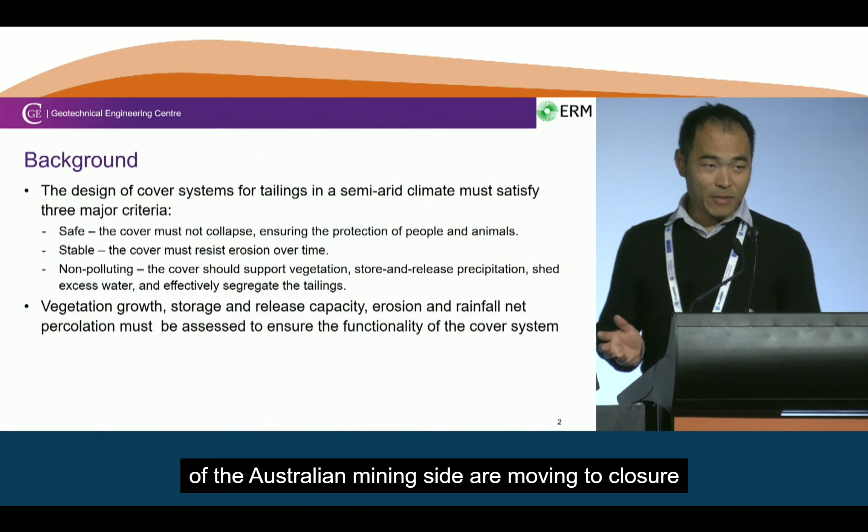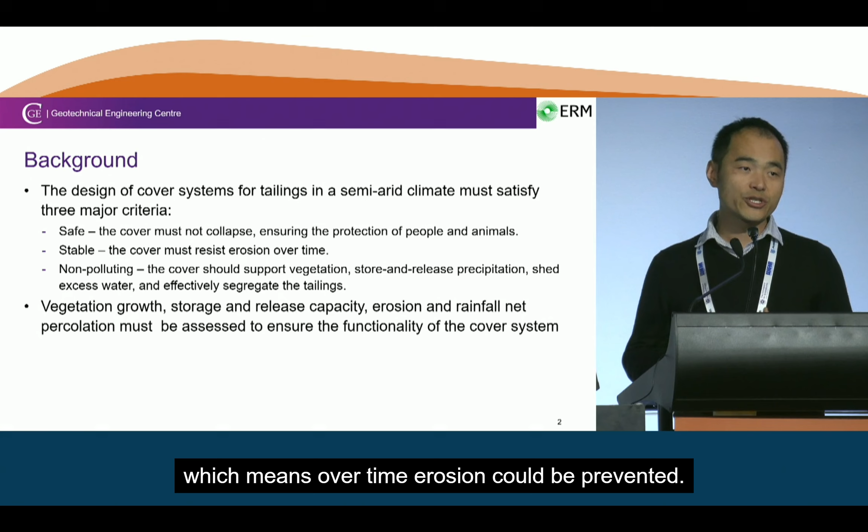Many Australian mining sites are moving to closure, and the closure has to meet 3 fundamental criteria. Safe, not killing people and animals. Second, it needs to be stable, meaning over time erosion could be prevented. Number 3 is non-polluting, meaning it's able to store and release water for vegetation growth, so eventually the landform is able to sustain itself.

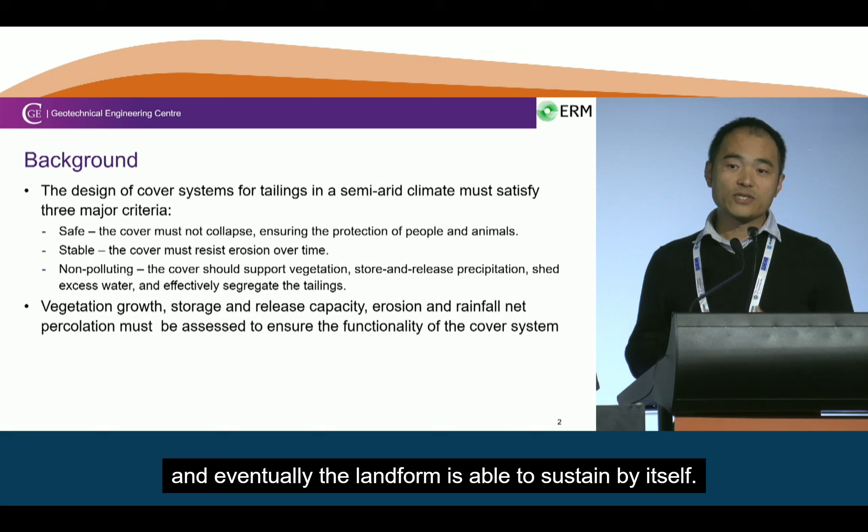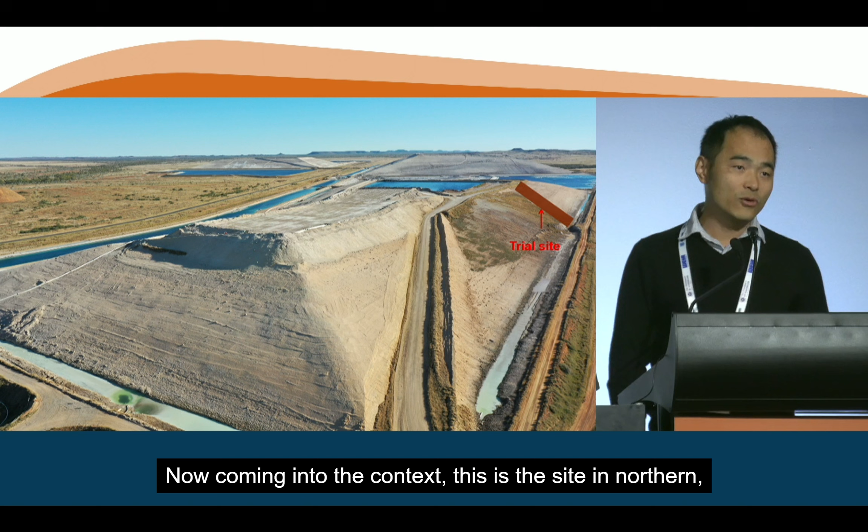All of those factors must be assessed by the soil cover, and these are the criteria we must meet. Coming into context, this is the site in northern Queensland. The local rainfall is about 400 millimeters per year, and the evapotranspiration potential is about 3 meters. So basically there is a water deficit.

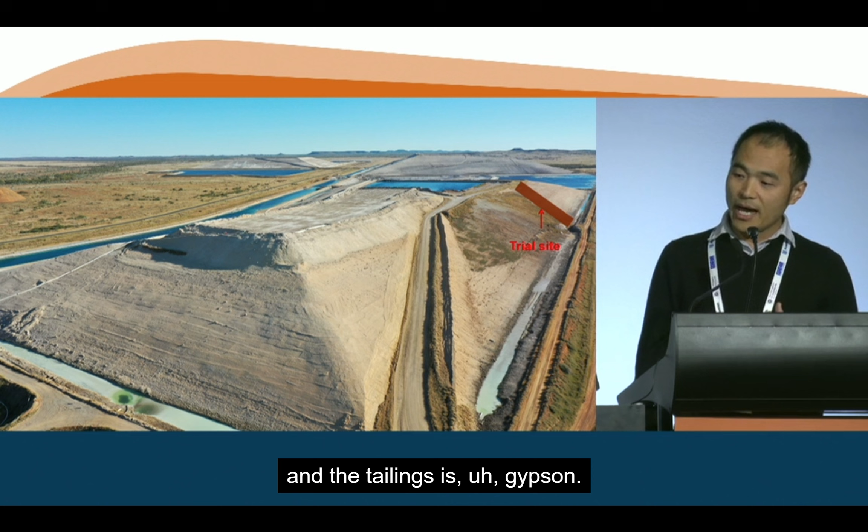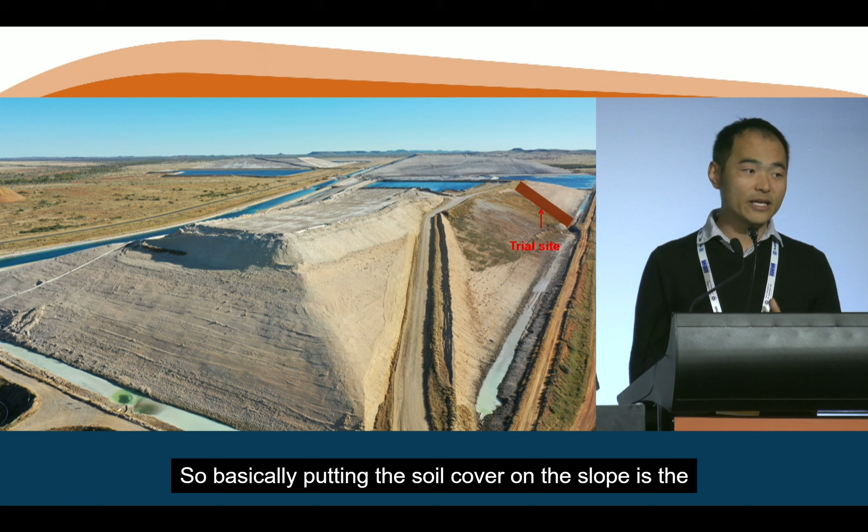The tailings is gypsum, which is able to cement itself, so there's no tailing dam. But if you look at the footprint, the majority of the site is actually on the slope. So putting the soil cover on the slope is the primary goal for this cover trial.

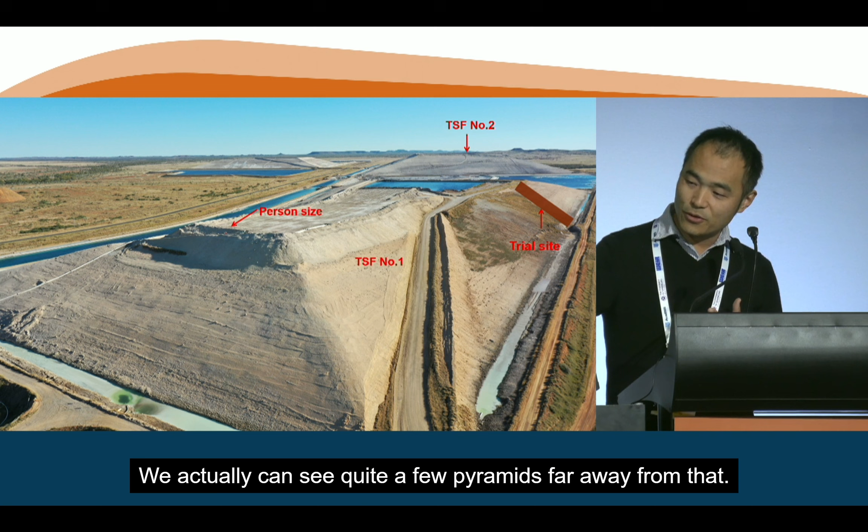We chose a trial site that is the far end of it. This is one of them - we can actually see quite a few pyramids far away. So you can see even the trial itself is large, but if you look at the whole landscape, this is actually a tiny little patch on top of it.

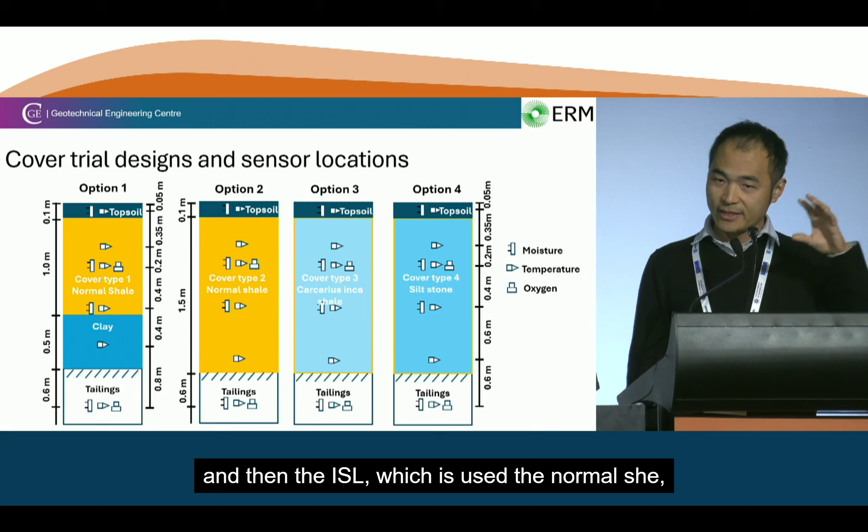Now look at the cover designs. The first one is the very typical design, with a permeability reducing layer, then the ISL, which uses normal shale since they have abundant material. Topsoil is used to accelerate root growth at the very beginning.

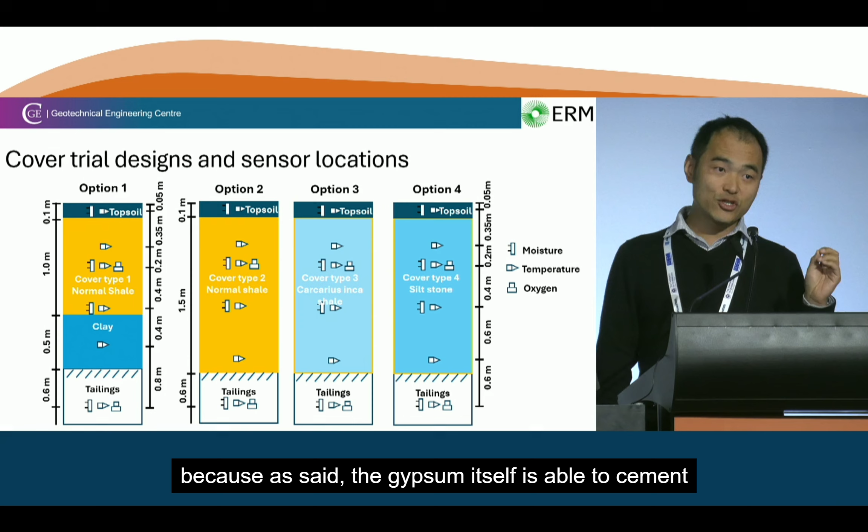The second one is usually the preferred version where the reduced permeability layer is removed, because the gypsum itself is able to cement and effectively reduce the tailing water uptake into the ISL, which is supposed to be the root accommodation location.

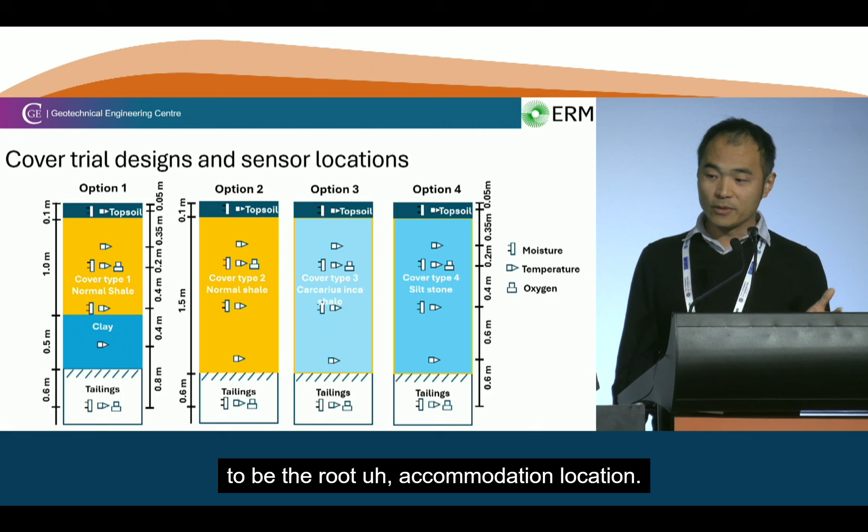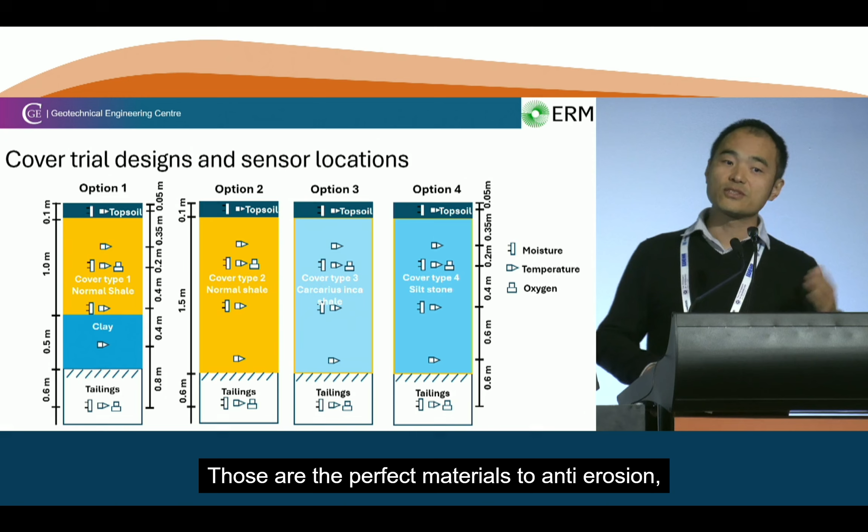Number 3 is a bit more erosion resistant. It has calcareous material which is relatively large. Many of you have been walking along Coronation Drive - aside of the river you see rocky material. Those are the perfect materials for anti-erosion, but the stock is relatively limited.

The number 4 material is relatively rigid, so over time it doesn't break down, but they have to intentionally mine under the ore. So it's not a preferred option, but at least we can try all of them.

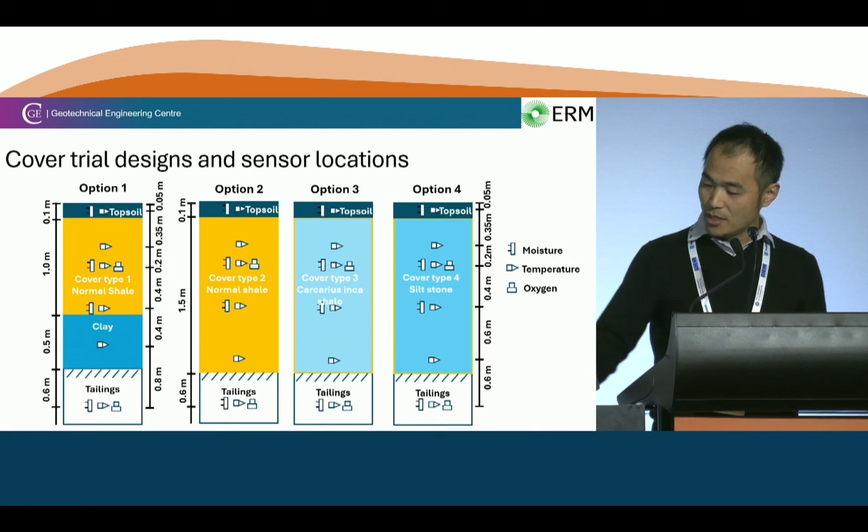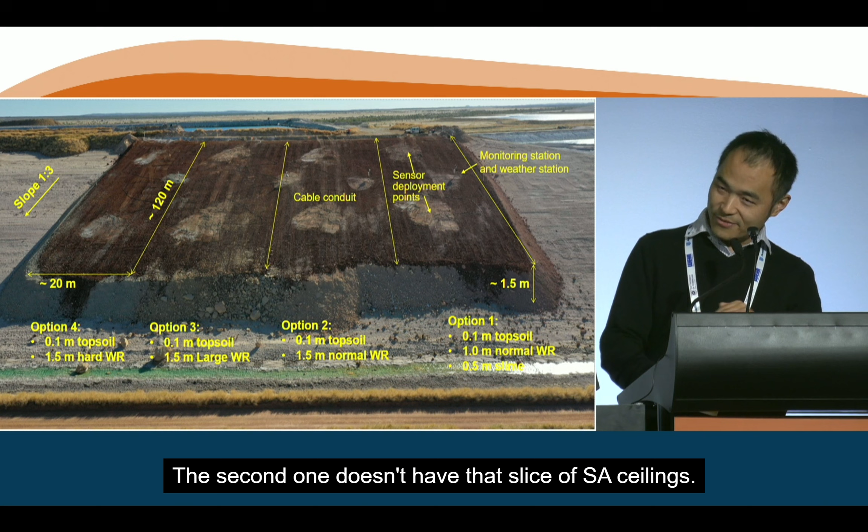This is the first trial with the sealing layer at the bottom. The second one doesn't have that slice of sealing. Number 3 is calcareous, number 4 is silt stone. This is like a birthday cake, isn't it? That's what it looks like to me. It looks quite amazing.

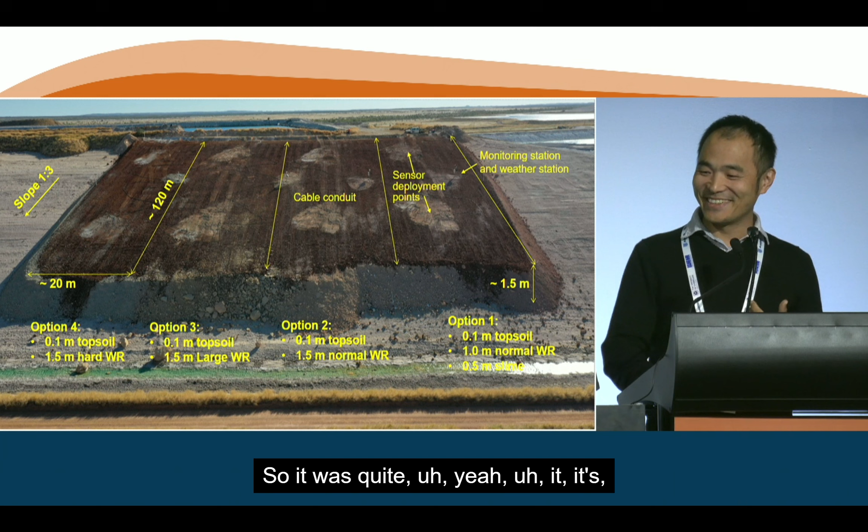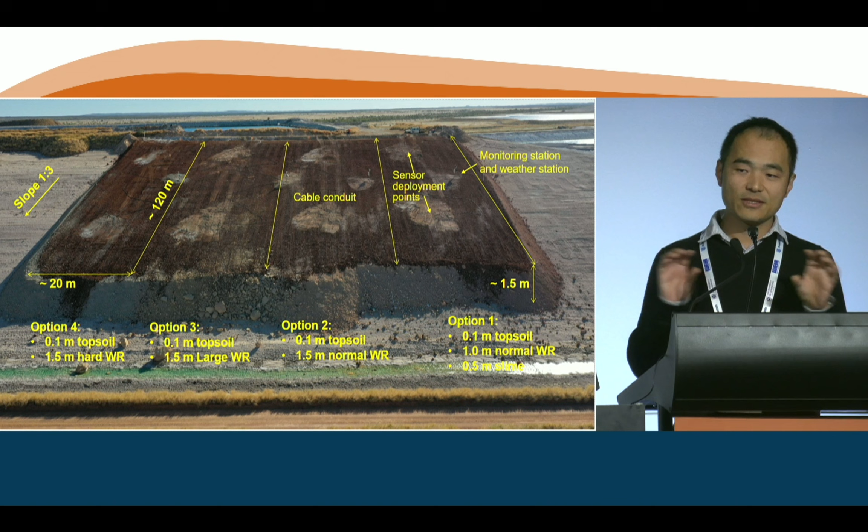Installation was done and backfilled. You can see the color contrast is slightly different - this is mostly associated with moisture content, because once it's disturbed there's a bit of contrast between the two.

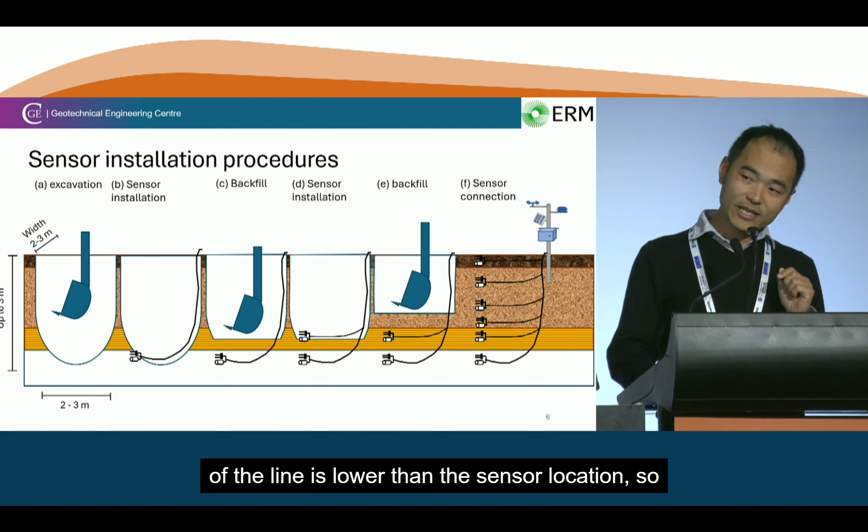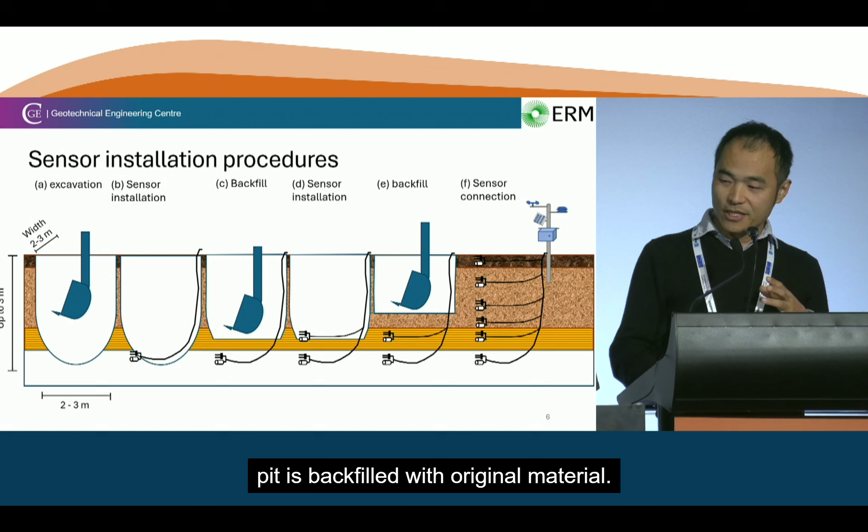Talking about sensor installation, it was done by excavation using a 15-ton excavator, excavated to a depth of 3 meters, putting the sensor in. One key thing is to ensure the bottom of the line is lower than the sensor location, so that any preferential pathway directs water there instead of onto the sensors. Then we repeat the whole process until the whole pit is backfilled with the original material. That's the overall process.

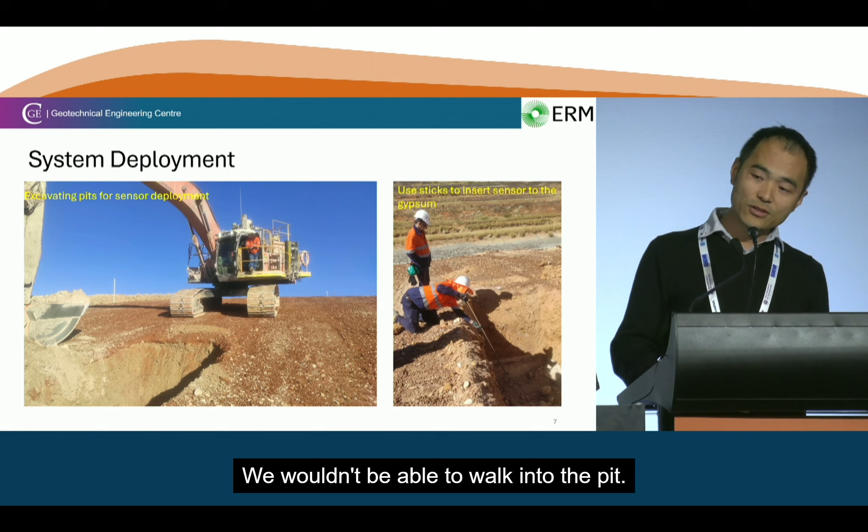Next is some of the on-site situation. If the pit is relatively deep, we wouldn't be able to walk into the pit - instead we use a stick to push it and then backfill with the material. Looking at the horizons, you can see tailings, ISL, and then the topsoil, backfilled with the material. There's a lot of cable to manage.

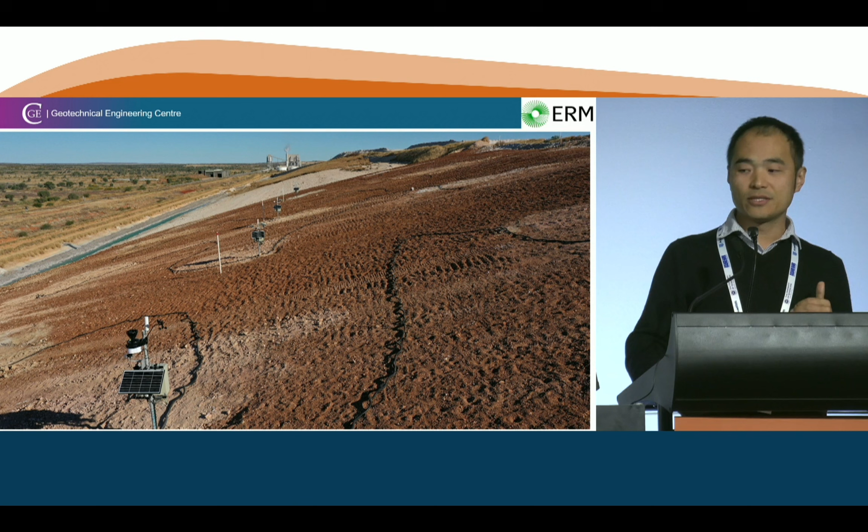Now, finish all of the setup. We got the weather station, one vertical profile at the downstream, one profile at the upstream, and they all monitor the moisture, suction, and oxygen levels at different locations. So hopefully more water will be accumulated at the downstream side of the slope, a little bit less at the upstream, due to potentially a phreatic surface developed in there.

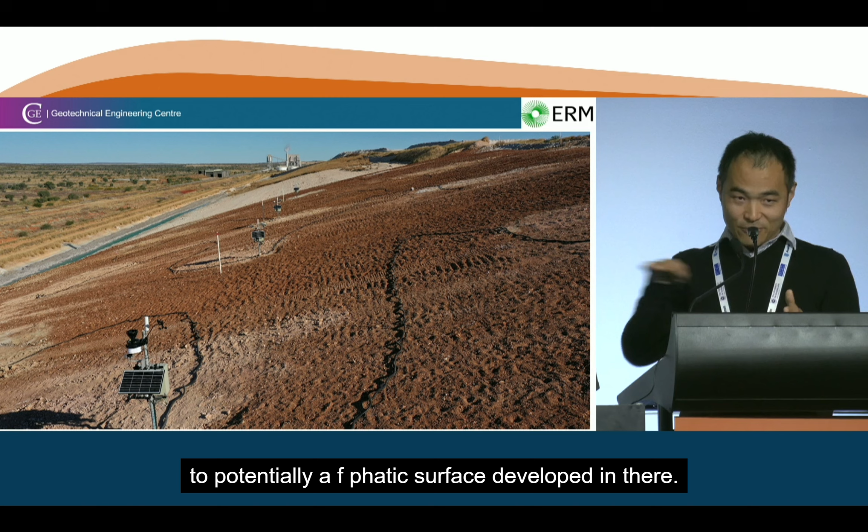Now, the information listed is: number one, the rainfall is about 400 millimeters per year. The second is that rainfall typically occurs 4 to 6 storms per year, so it's 4 big lots or 6 big lots instead of drizzling all day. Thickness is about 1.6 meters, and the batter slope is 1 to 3 gradients, so it's on the slope.

So does anyone believe that the infiltration could go towards the tailings, 1.6 meters below ground? Anyone believe so? Could you raise up your hand, please?

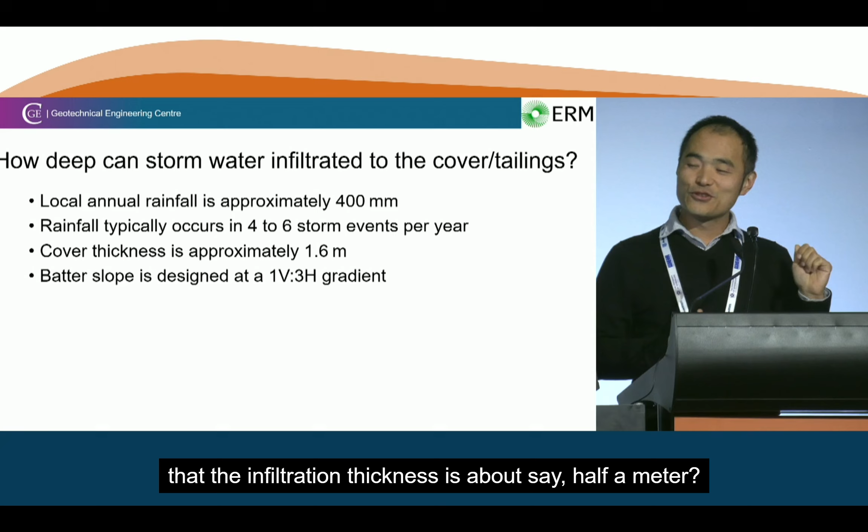There's just 2, 3. How many of you believe that the infiltration thickness is about, say, half a meter? I would say about 10%, right?

There are many people who haven't voted, so probably much deeper than that, say 3 meters? No one? And most of you believe that the majority of them goes by runoff, is that the case?

How many of you believe that the infiltration is very, very small and most of it goes to runoff? I would say that's about 20%.

Okay, I think we have that survey in mind. Okay, you have your own bet. Let's look at the result. I'll tell you my bet.

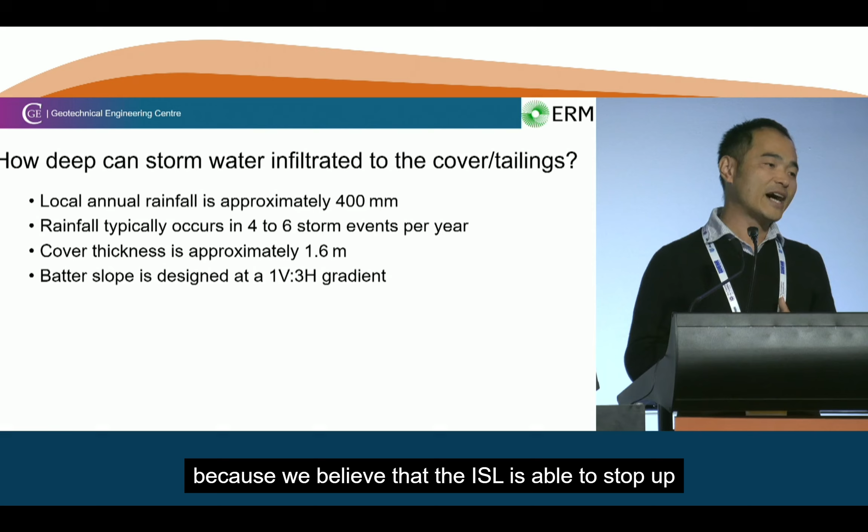The reason why it's been designed to 1.6 meters is because we believe that the ISL is able to stop up to that level, right? If it's just half a meter, we don't have to design to that depth. But the reality actually tells a very interesting story.

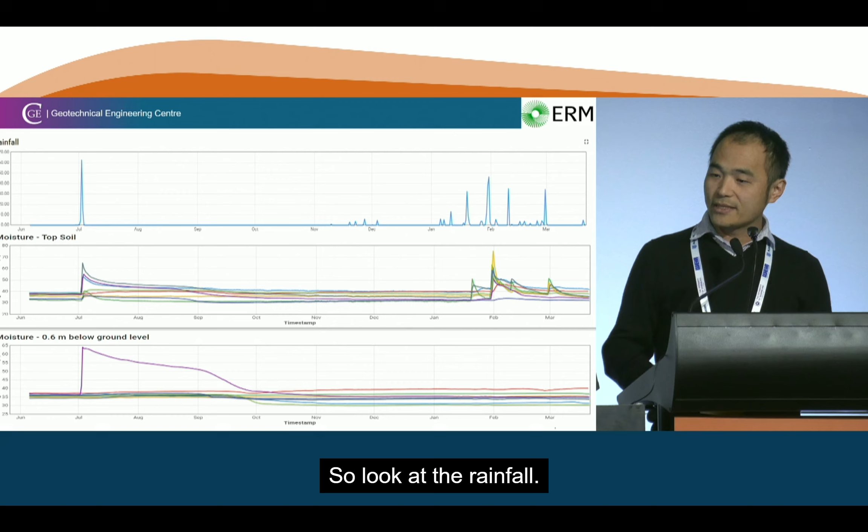So look at the rainfall. This is from June to March. We have longer data, but this one would be very useful to look at the differences. We've got a big storm in the winter, and then a lot of small storms in the rainy seasons.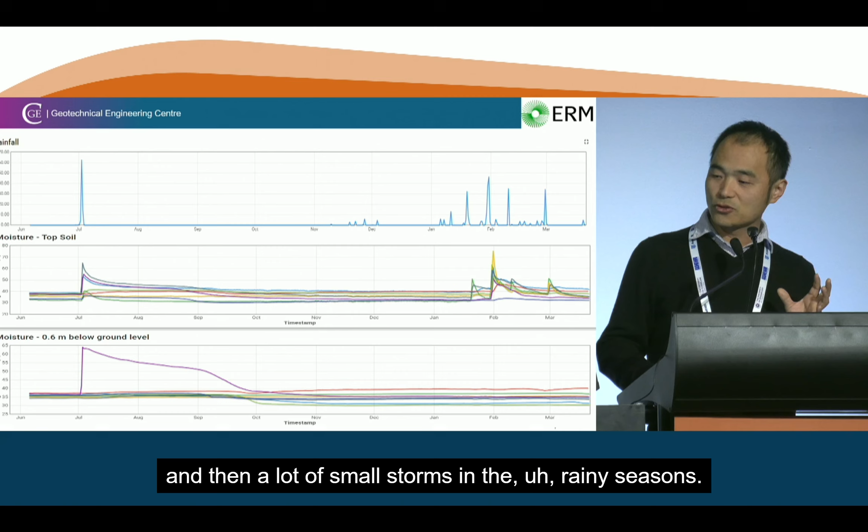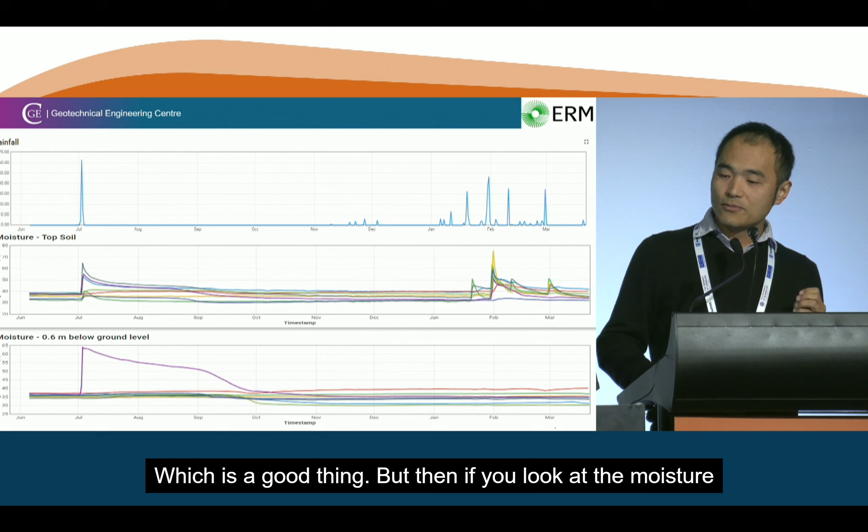So the topsoil across all of those plots clearly responded to the rainfall, clearly, right? Which is a good thing. But then if you look at the moisture at 0.6 meters below ground level, there is only the calcareous, the large rocky material that allows infiltration to take place. But the rest of them doesn't really pick up the infiltration at all.

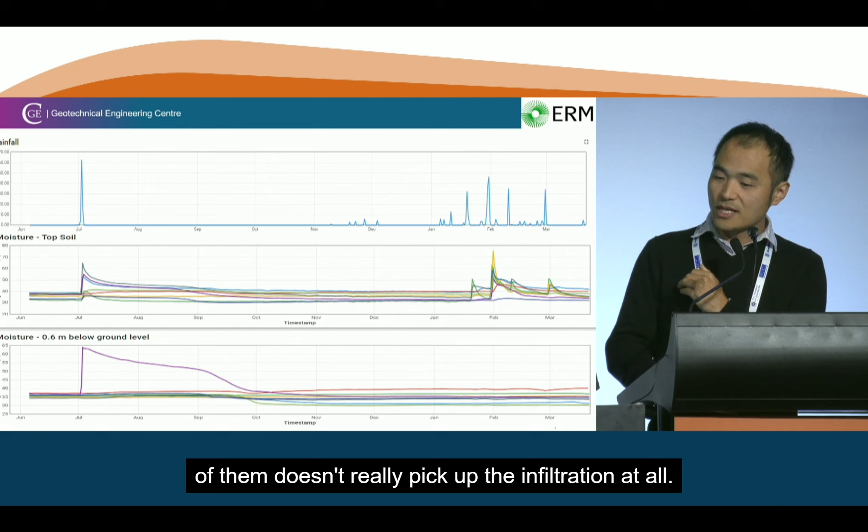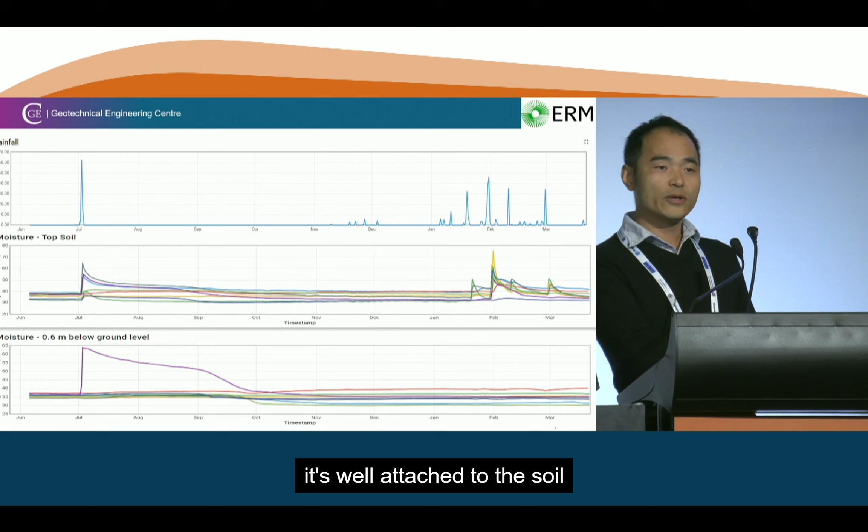What happens then is that we basically scratch our heads and say, what's going on? Are we installing the sensor properly? But I don't think so. We push the sensor quite well. It's well attached to the soil, and it should be able to have a good contact. And the result is pretty consistent.

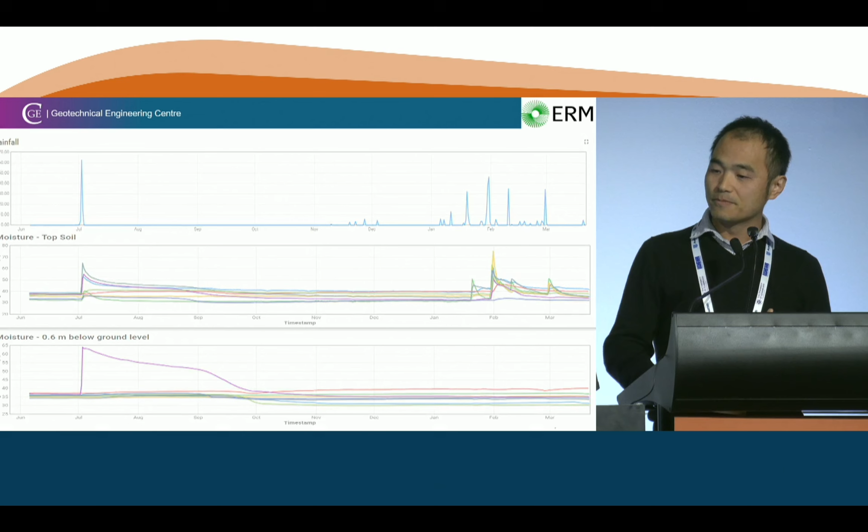The way how we're able to find what's going on is actually using the on-site footage. So here is the picture that shows immediately before the storm. You've got the vegetation, and you can see the color is relatively dark, so that means the storm is coming. This is the picture that shows immediately after the rainfall.

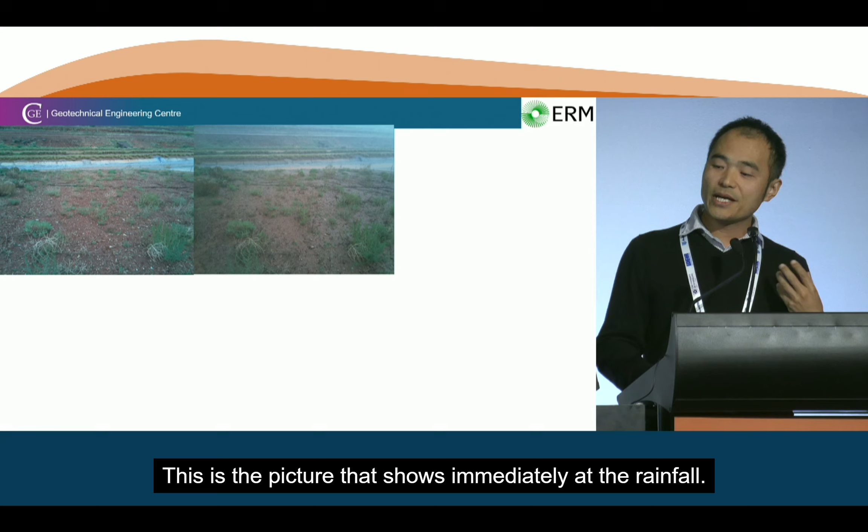You can see there's a lot of splash. The topsoil gets well mixed with the water, and that could potentially fill all of the large pores formed within the soil, which effectively reduces the infiltration and the permeability of the topsoil. As a result of that, the infiltration is actually limited.

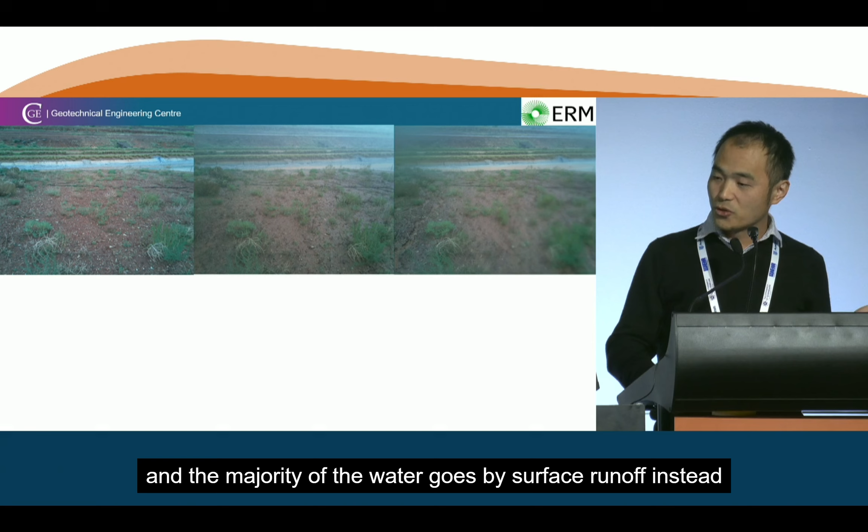Now, most of the water is stored within the surface, and you've got a slope. What will happen? Surface runoff, right? So you can see that gullies started to form, and the majority of the water goes by surface runoff instead of infiltration. So this is the situation after the storm. You can see quite a bit of gully started to form, and those could be deepened over time, right? Now, we've monitored the moisture content, but it doesn't really tell us the water balance, right?

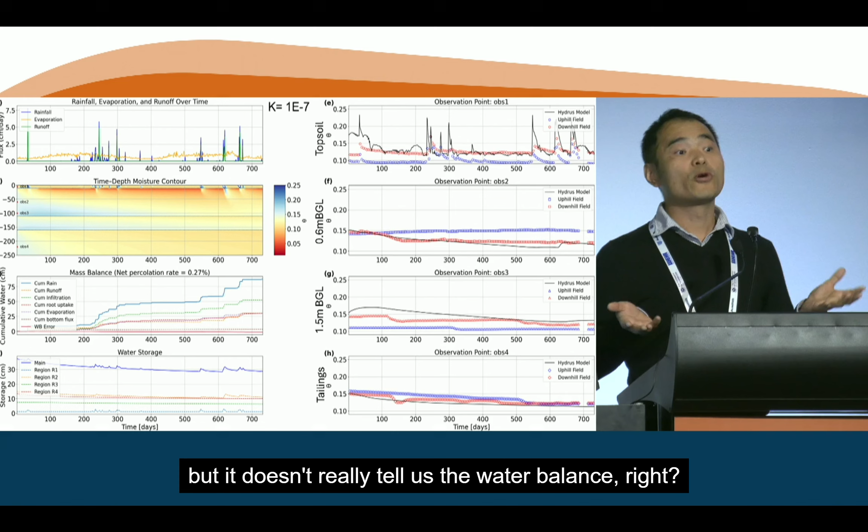The best way to find out is to install lysimeters and have multiple lines of evidence, but it will always be good to have a numerical model to support the mass balance.

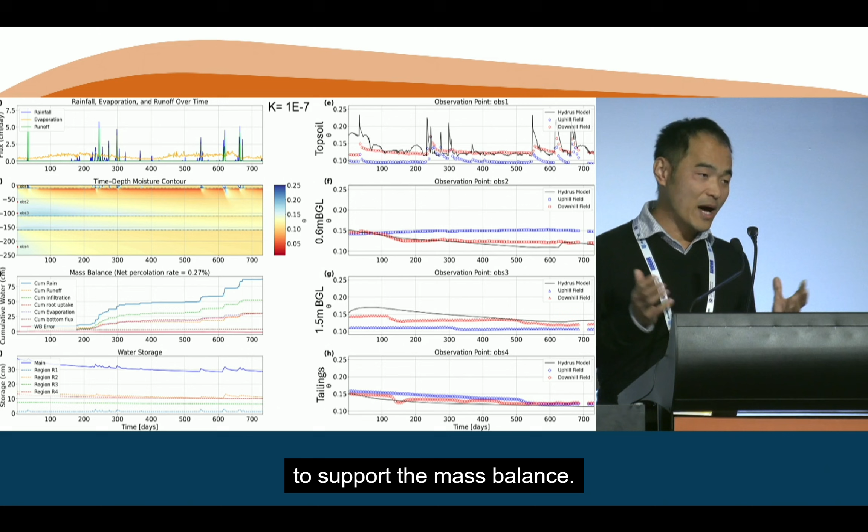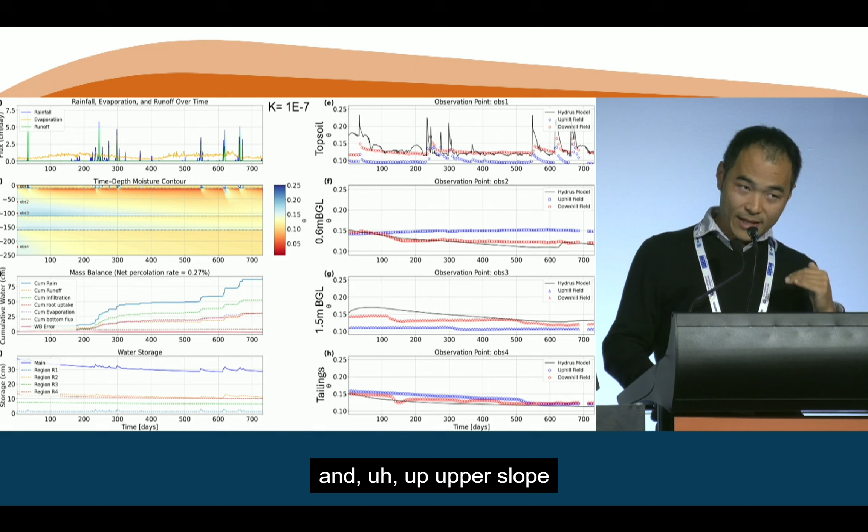So what we did is use Hydrus to simulate the moisture profile over 700 days, basically 2 years. The dots show upstream, upper slope, and lower slope moisture content measured, and the lines are the simulation results. You can see the models capture reasonably well the rises and falls of the moisture content.

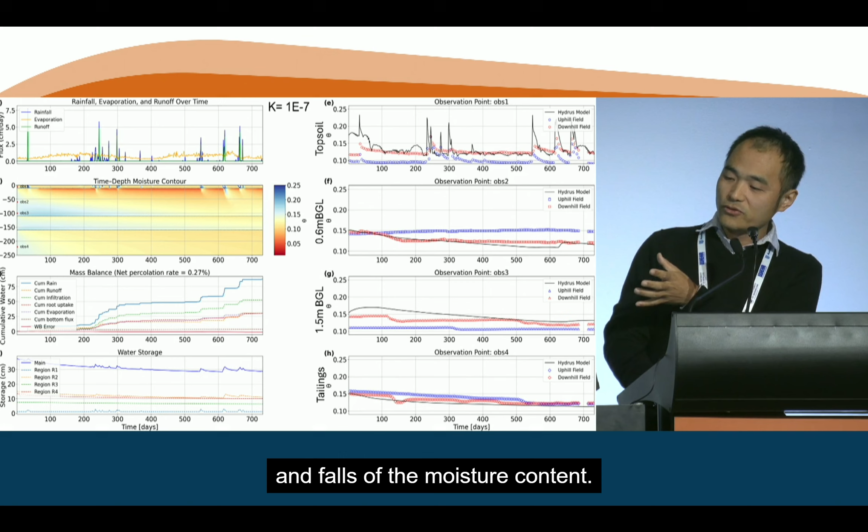We gain confidence. The model is calibrated. Now it's a crystal ball, and we're going to do some predictions to see what really is happening.

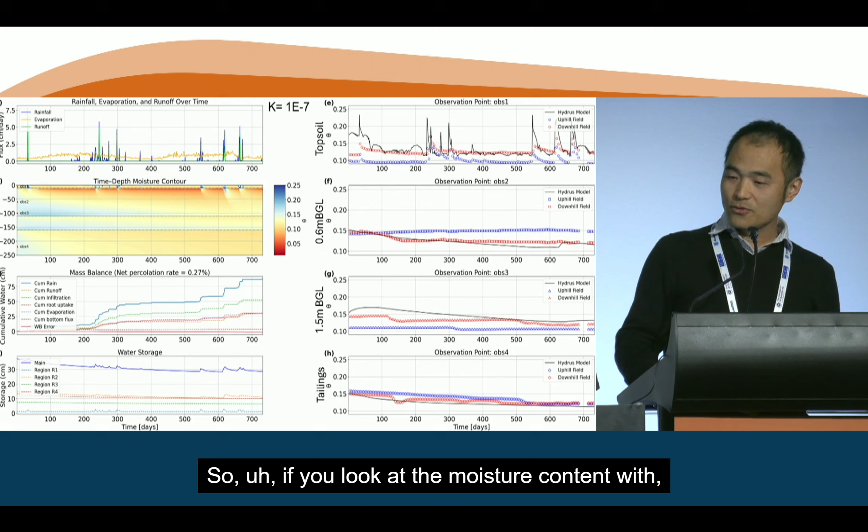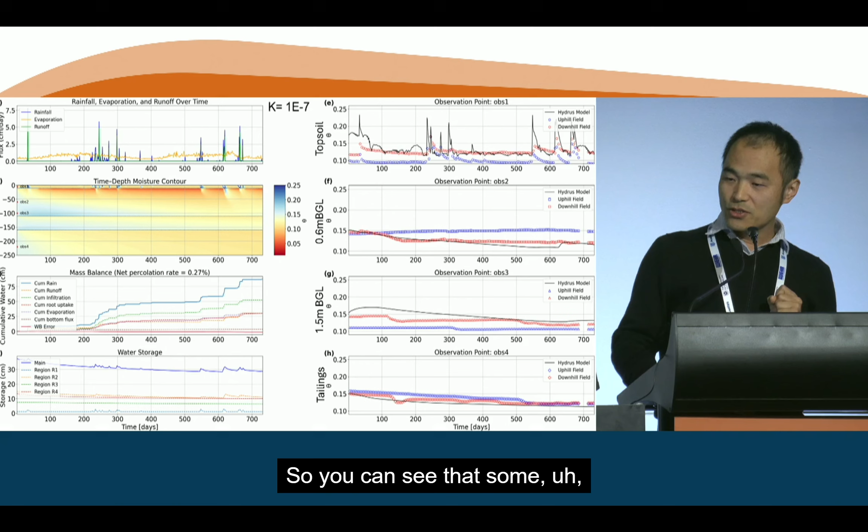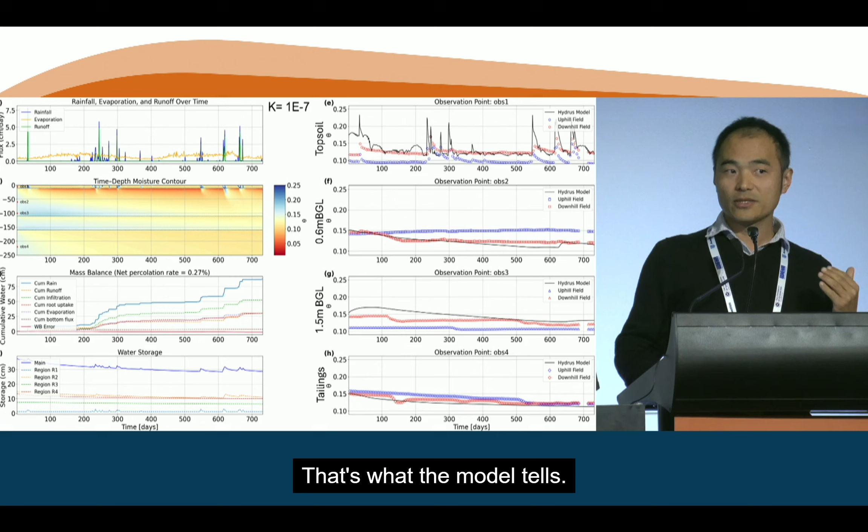If you look at the moisture content with depth over time across 700 days, the color shows blue for high moisture content and red for dry. You can see the moisture content responded reasonably well to rainfall, but the infiltration thickness doesn't go beyond 0.5 meter. That's what the model tells us, pretty consistent with observation.

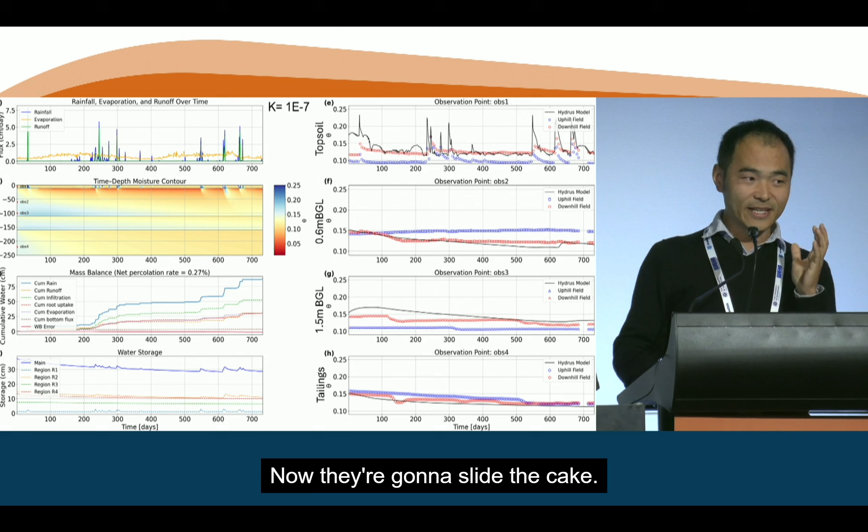Then we can do a water balance. This is the cumulative water balance here. The blue line is the cumulative rainfall, over 2 years about 800 millimeters. Now they're going to slice the cake: the surface runoff, shown in orange, is about a third of it. So a third goes to surface runoff, and two-thirds goes to infiltration.

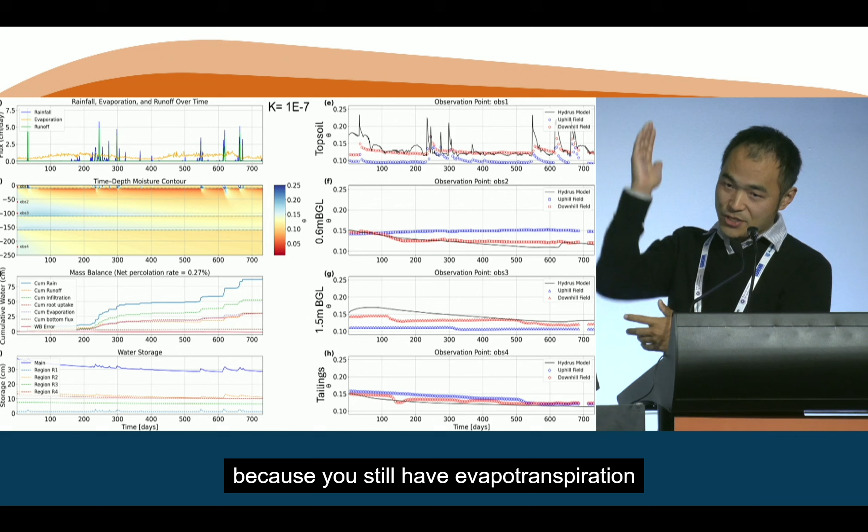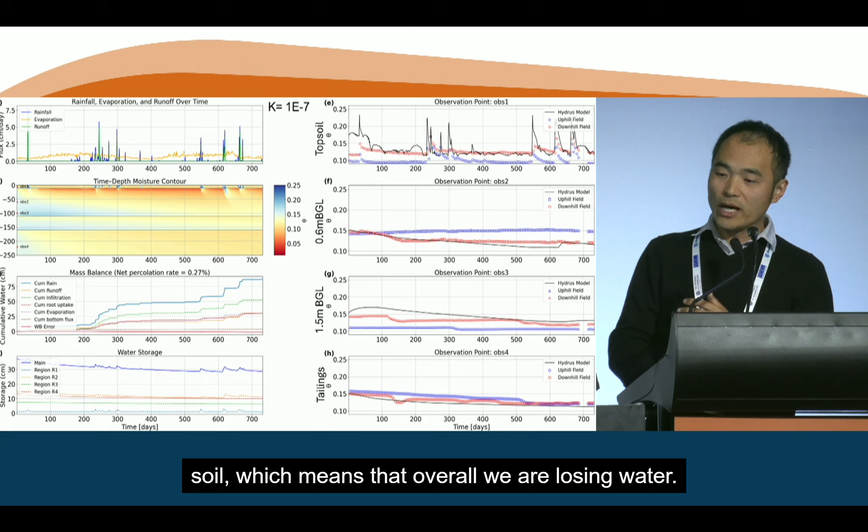But infiltration doesn't mean net percolation, because you still have evapotranspiration taking the water back up. Transpiration and evaporation added together is actually more than the total infiltration into the soil, which means overall we are losing water. So you see a lot of blue, but later it becomes yellow and red, indicating that overall we're losing water. The system has not yet reached a steady state. We still have to keep monitoring.

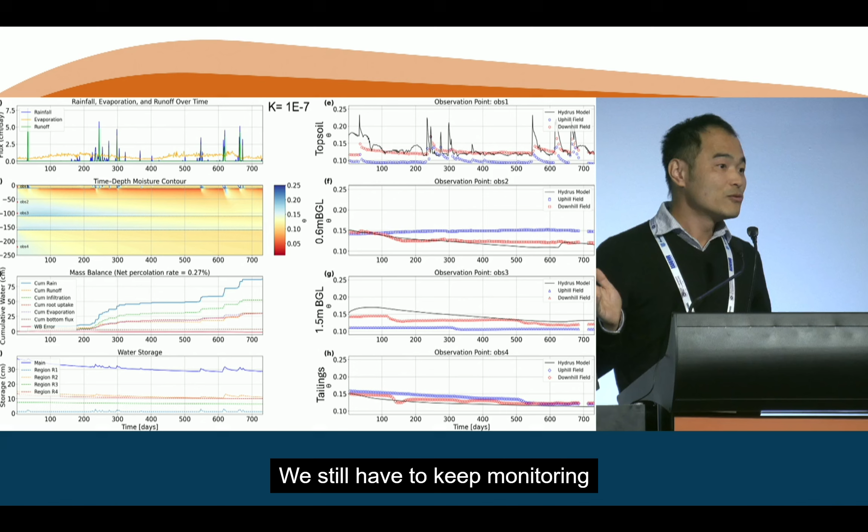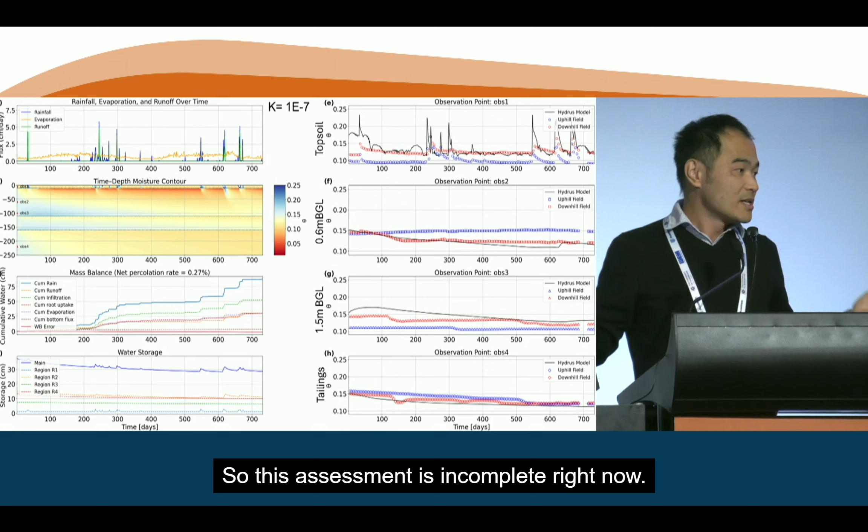And bear in mind, this data is actually in the La Nina season, and we're about to reach the El Nino season where rainfall would be limited. So this assessment is incomplete.

Now, move on to the vegetation. Thankfully, the video footage lets us see the growth and some of the weeds tumbling and moving around. During the dry season, it starts getting yellow, and during the wet season, it becomes green again.

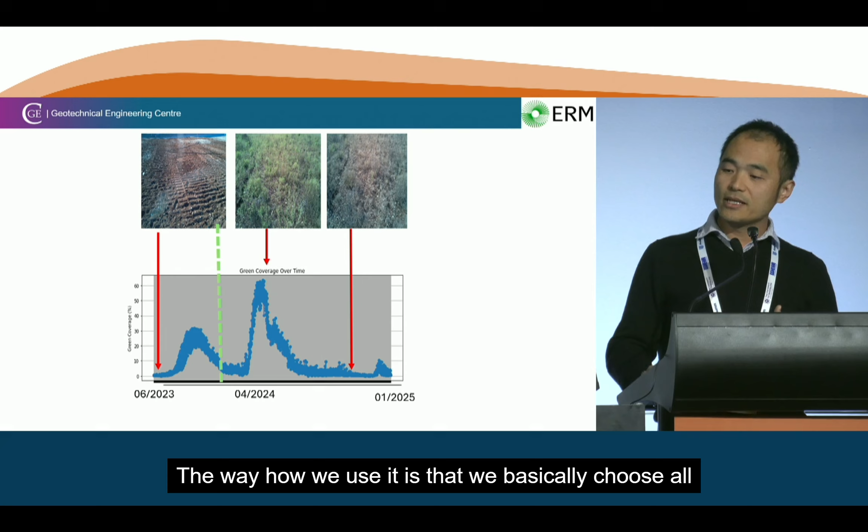This is very consistent with other locations, where you see not only vegetation growth but also gully formations. The way we use it is to basically choose all the green pixels and stitch them together to see the kind of green index. This index covers a relatively short period.

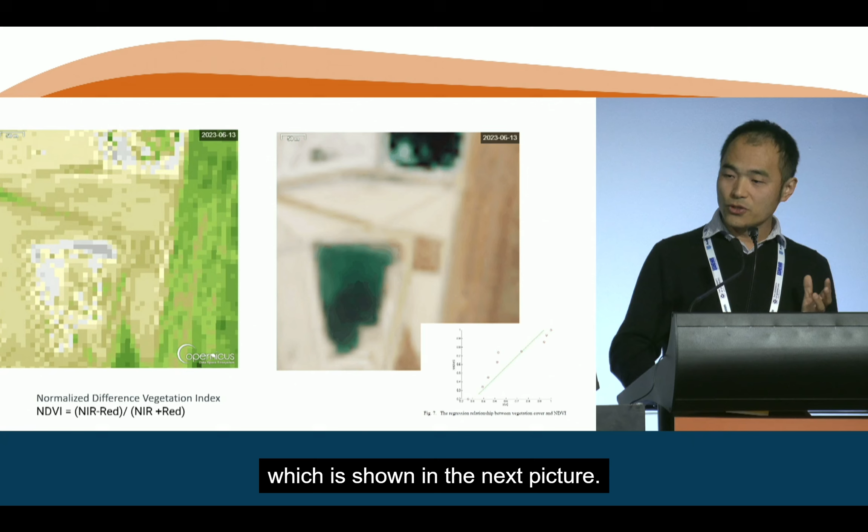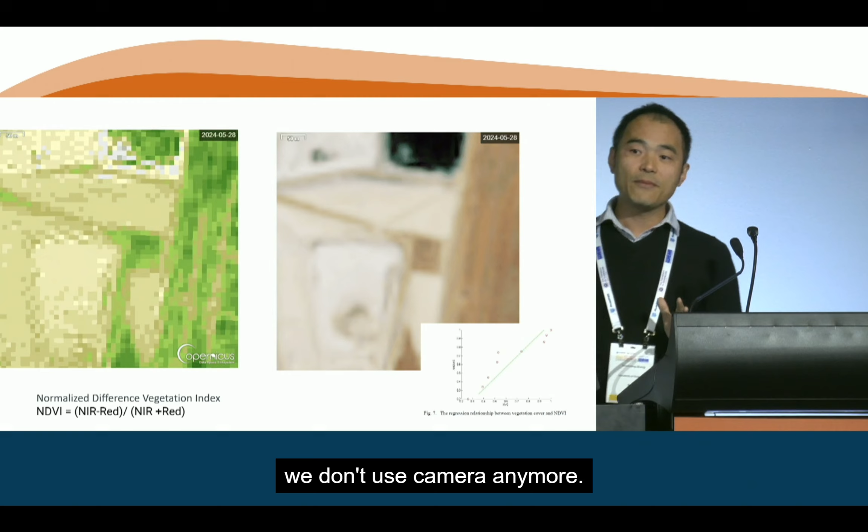The way to extrapolate it is to compare that with satellite imagery, shown in the next picture. This is where the trial is located. We associate these two, and if they agree reasonably well, from then onwards we don't use the camera anymore. We basically use satellite imagery to predict how the vegetation grows over time. This is an ongoing process, so we don't have a conclusion yet.

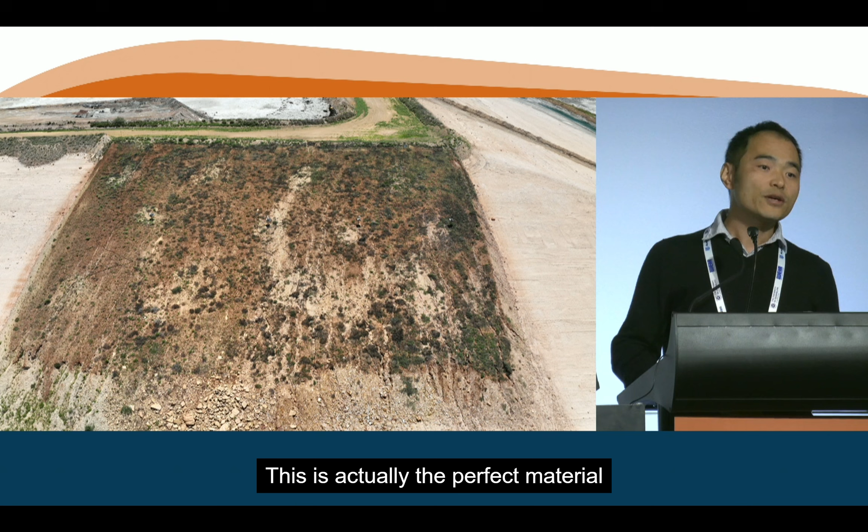This is 2 years after, so nature has somehow disturbed the mud cake, unfortunately. But one takeaway message is that with the rocky material, you don't really see a lot of gully formation. This is actually the perfect material to cover the surface. So we more or less figured out that you probably don't need a lot of material to cover the slope, but you do need the rocky materials.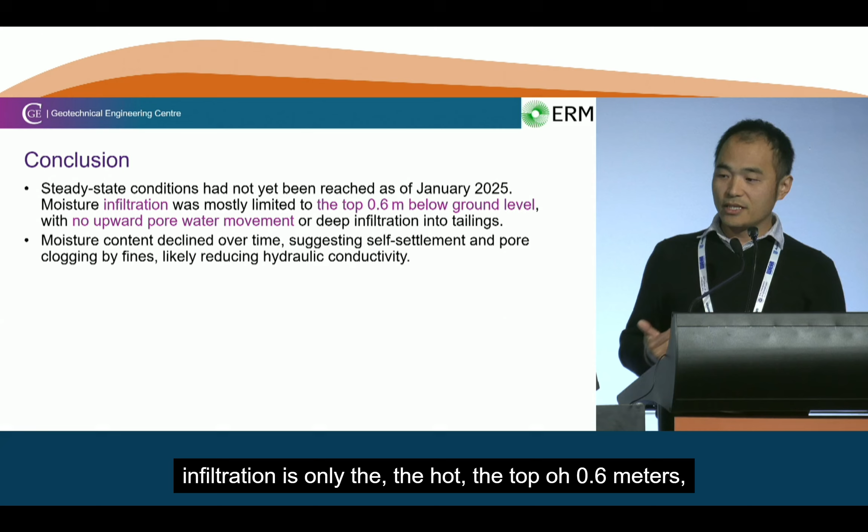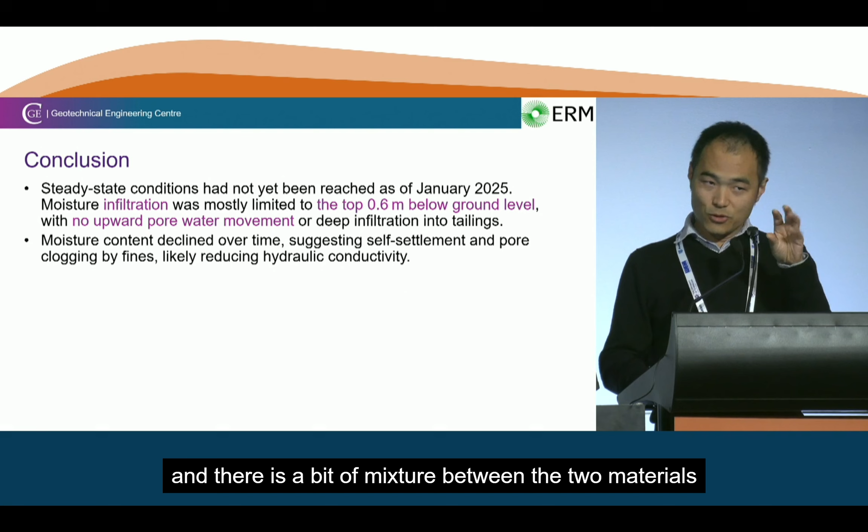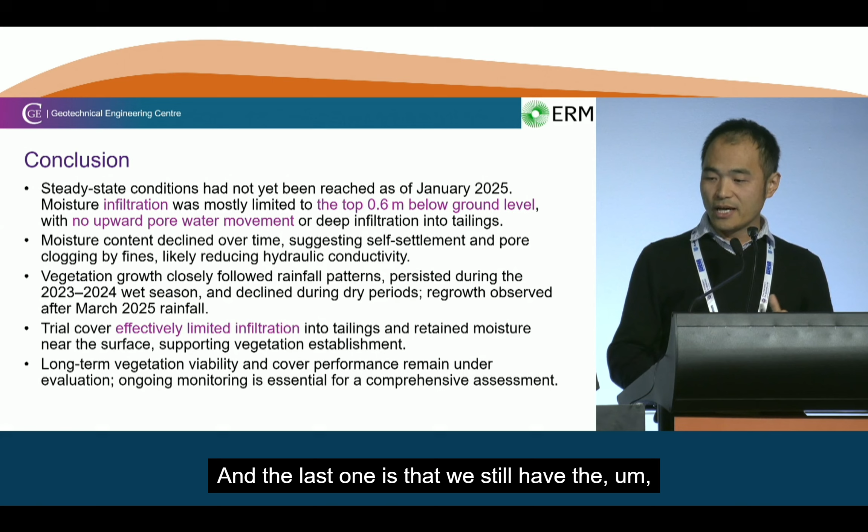So, takeaway messages: we haven't yet reached a steady state. Infiltration is only in the top 0.6 meters, with almost no upward flow from tailings to the ISL. Moisture content is decreasing over time, and there's a bit of mixture between the two materials that could effectively limit infiltration. Third, vegetation is very much associated with rainfall patterns, and the cover effectively limits infiltration. Last, we still need continued monitoring to understand the vegetation growth pattern.